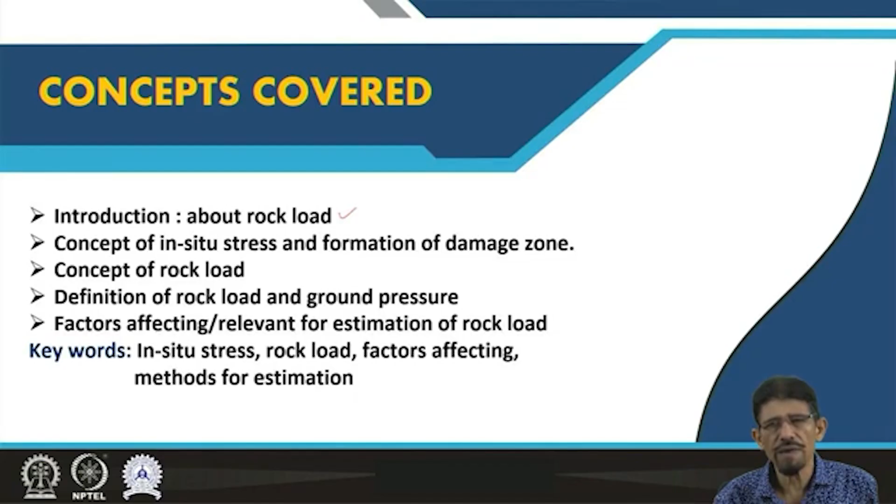Regarding this lecture, we are going to elaborate about concepts concerned to the rock load, and then the concept of in situ stress and deformation, and then formation of damage zone, concept of rock load, definition of rock load and ground pressure, then factors affecting or relevant for estimation of rock load.

Friends, the design and behavior of an underground space structure varies from that of other engineering structures developed on ground surface. In case of ground surface structure, the loads are transferred through certain arrangement to the ground or strata or subgrade, and in case of underground structure it is complicated.

In case of subsurface engineering structure, the load is caused by overburden pressure and due to tectonic stresses, while in case of surface engineering structures, dam, bridge and building, road pavement, highway pavement, etc., the loads are transferred by the appropriate supplementary engineering structure to the foundation element below the geological ground. Hence, we can say that underground structures are constructed within the geoground with many unknown parameters.

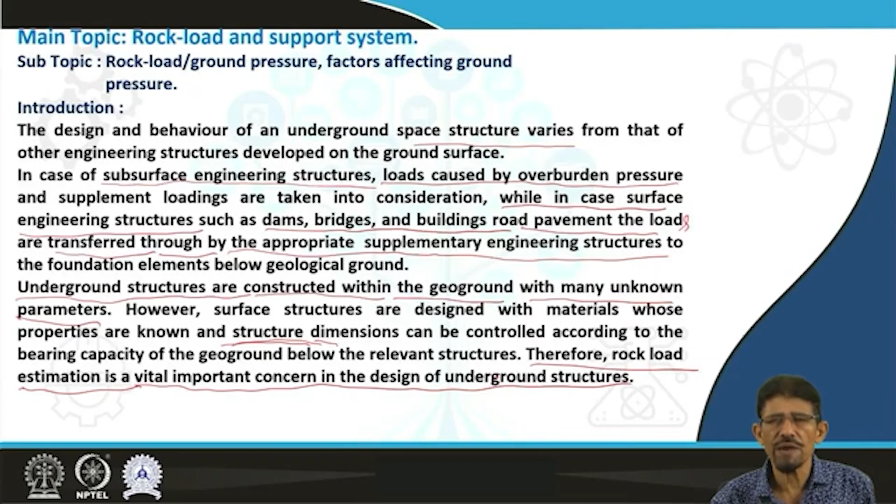Nowadays, we are moving towards the development of underground structures to make the routes shorter, to store hydrocarbons, to dispose some hazardous wastes inside the subsurface, and various underground laboratories, defense chambers. Besides this, classical problems can arise due to variation in rock type from surface toward the depth, then the structural features in rock masses and age of rock formations.

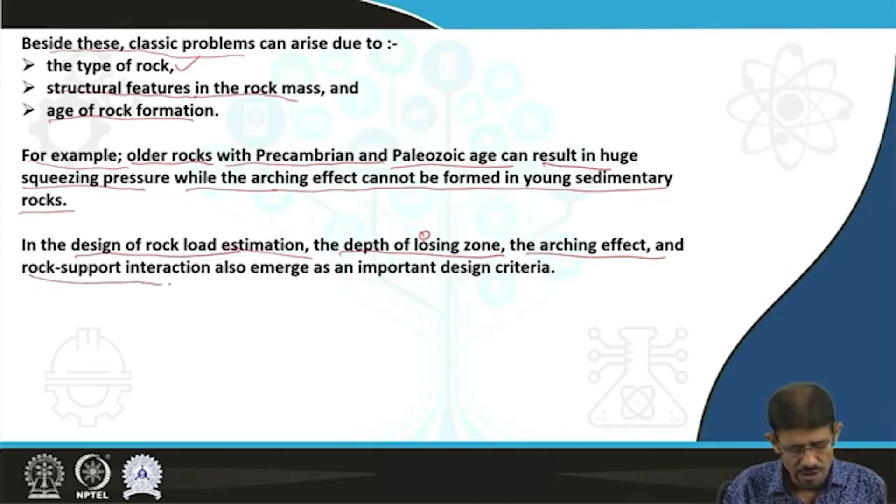Besides this, for example, the older rocks of Precambrian and Paleozoic age can result in huge squeezing pressure. Squeezing pressure is due to deformation of rocks, while the arching effect cannot be formed in young sedimentary rocks. And in the design of rock load estimation, the depth of loosening zone, the arching effects and the rock support interaction also emerge as important design criteria.

Now we are going to see the factors affecting or controlling the rock load, that are relevant parameters utilized for evaluation of a rock load. So first thing, what is rock load? Then we are going to see different types of approaches and parameters. Rock load is simply the weight of rock strata or rock mass experienced on the support system or on ground, therefore known as ground pressure.

The rock load can be estimated involving important controlling or affecting parameters, namely first in situ stress. In situ stress plays a very important role, that is the initial state of stress in any rock strata or geoground. Another component is structure of rock mass. Previously we have discussed the concept of rock mass, that is rock block plus joint. So what are the features of joints present in rock mass?

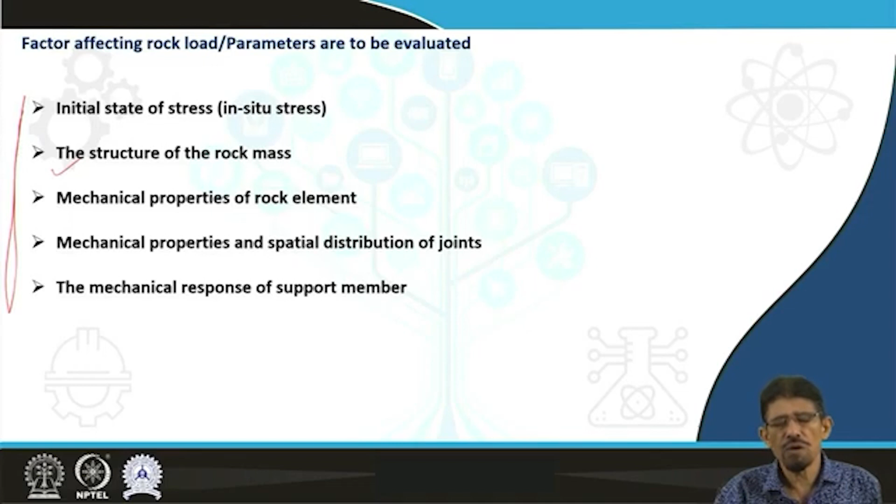Then the mechanical properties of rock element. Then mechanical properties and spatial distribution of joints present in rock mass, which are responsible for making rock strata, and then mechanical response of support members. The knowledge concerned to the in situ stress, the structure of the rock mass, mechanical response of rock element, distribution of joints and mechanical response of support members is going to help in estimating the rock loads. So one by one we are going to elaborate.

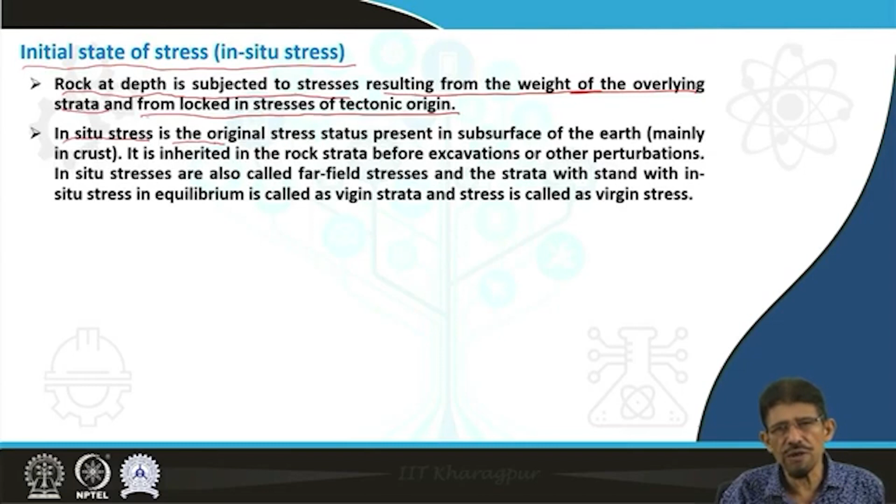Initial state of stress or in situ stress: the rock at depth is subjected to stresses resulting from the weight of overlying strata and from locked-in stresses of tectonic origin. In situ stress is the subsurface stress. You can see here, this is the surface. The stress at a particular point below the surface is recognized as in situ stress. Stress present subsurface to the earth is recognized as in situ stress. As far as engineering geology is concerned, we are going to consider the earth crust, because our work is limited to the earth crust.

Sometimes, in exceptions, extended up to the upper mantle, the shallow level of the upper mantle. So the rock present over this point is going to make some impact in terms of load, that is the weight of overlying strata, as well as the tectonic changes due to underthrusting of plate, or due to upwelling of the magma, or due to various types of motions along the lithospheric plates, which are going to result in stress.

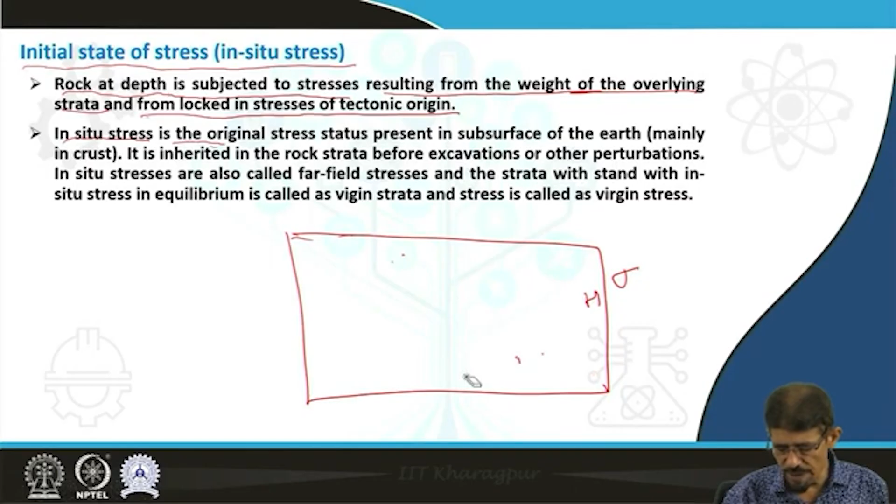So the overall stress present, or total stress present, at point A is recognized as in situ stress, and technically we have two components, one is horizontal, another is vertical. In another way we can say that in any strata or any ground, the ground is stable with its own system, its own in situ stress. The stress present here is recognized as virgin stress state, or this ground is under virgin stress state, or far field stress, or simply in situ stress, or initial stress, or stable stress.

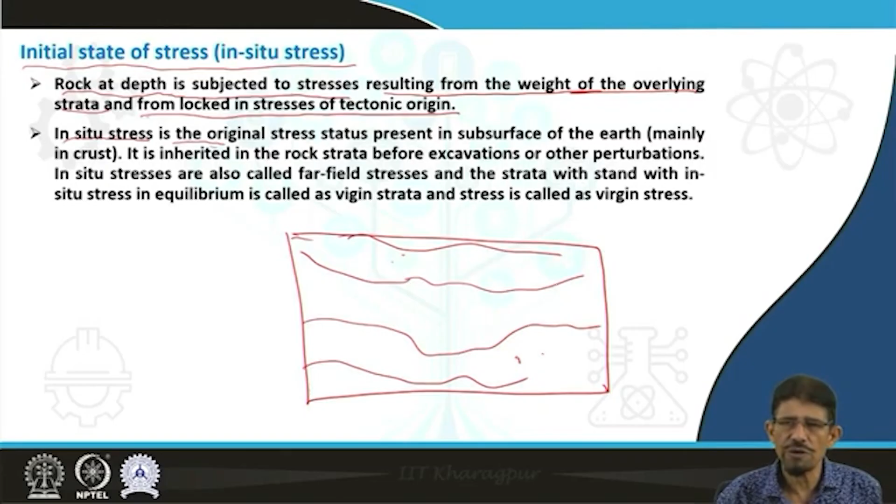In such a situation, when we are going to create any opening in rock strata or in geoground, the stress field is locally disrupted and a new set of stresses is developed in the in situ stress distribution. And these new set of stresses are induced in rock strata surrounding the opening. This new set of stresses is a redistribution of stresses trying to reach equilibrium condition.

In another way we can say that when an underground opening is made in rock strata, the stresses previously present in rock strata are going to show disequilibrium and require redistribution, and these new stresses induced due to creation of the underground opening try to establish re-equilibrium to maintain the original condition.

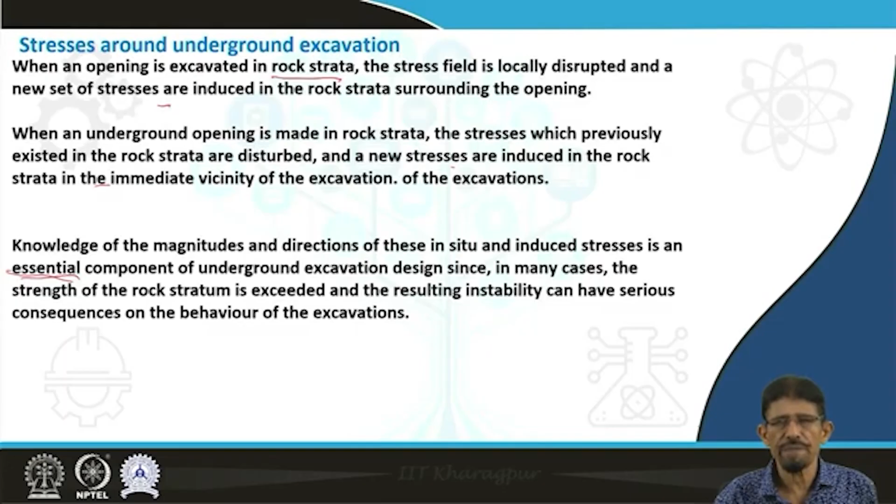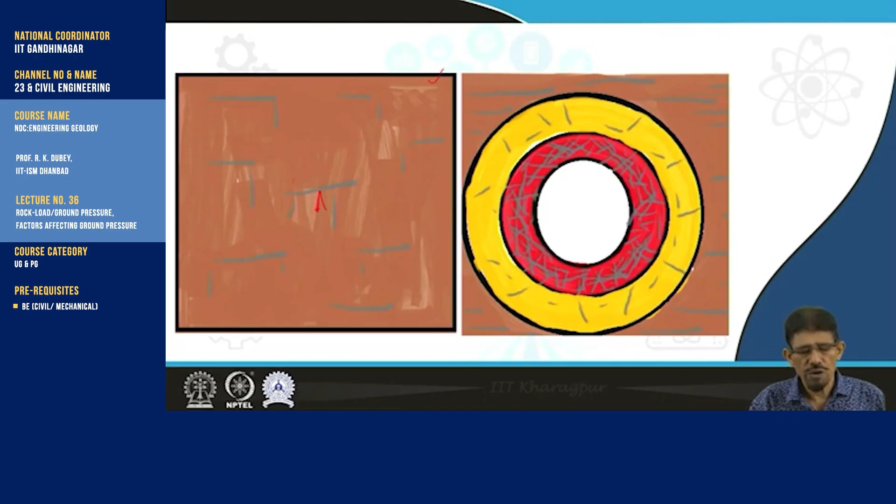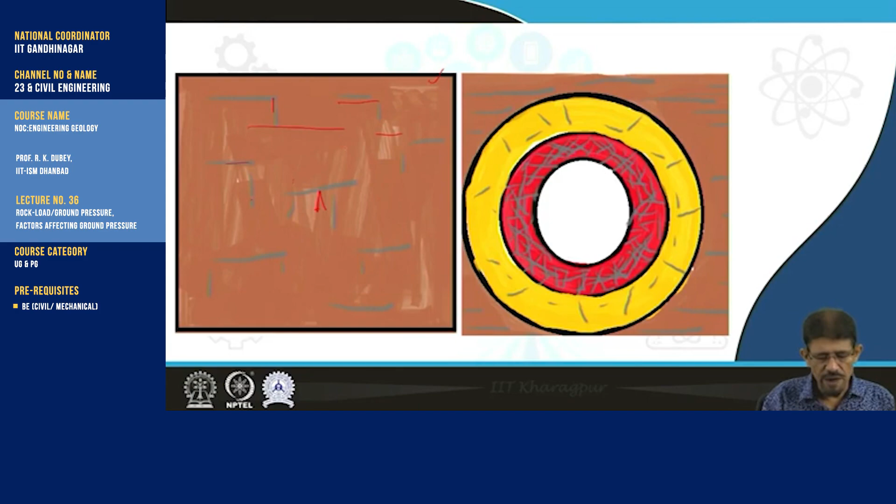Here I try to explain. This is virgin ground where this point A, in terms of in situ stress, is in equilibrium. There is no change in condition of in situ stress. The whole strata is in equilibrium, and the rock strata present in this ground is sufficiently strong and stable, not showing any type of deformation, damage and others.

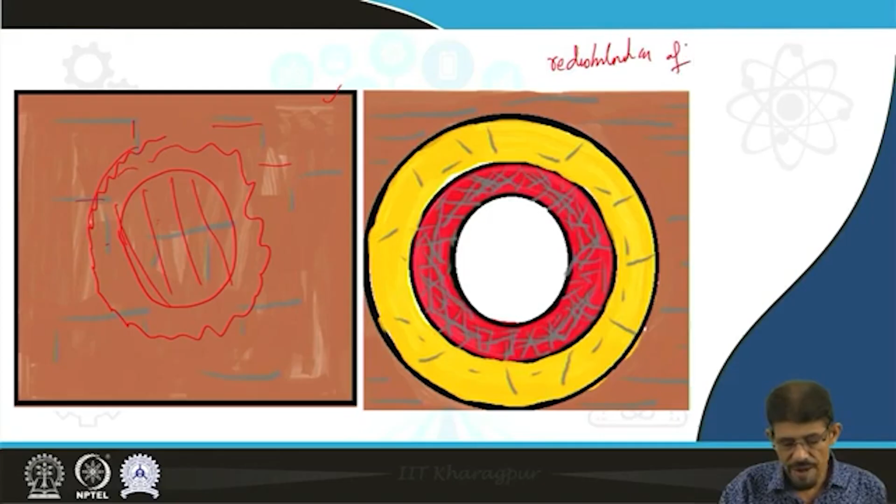When we are going to create any underground opening here in any shape, if we are going to excavate this zone, here you can see, then there is redistribution of stresses near this excavated zone. The redistribution of excavation induced stresses tries to reach the original condition. Due to its habit to regain its original condition, there is a formation of a damage zone. You can see, when we create this opening in this type of ground, there is a formation of one damage zone.

This is very simple. If there is impact on your body due to any thrust caused by a vehicle or caused by striking walls and others, the body tries to restore its original stress condition. To adjust to the original stress condition, if the body is unable to bear it, then there are some adjustment types of features. Similarly here also, due to adjustment of newly induced stresses to reach the original condition, if the strata is unable to bear this type of adjustment, then there is a development of a deformed zone or damage zone.

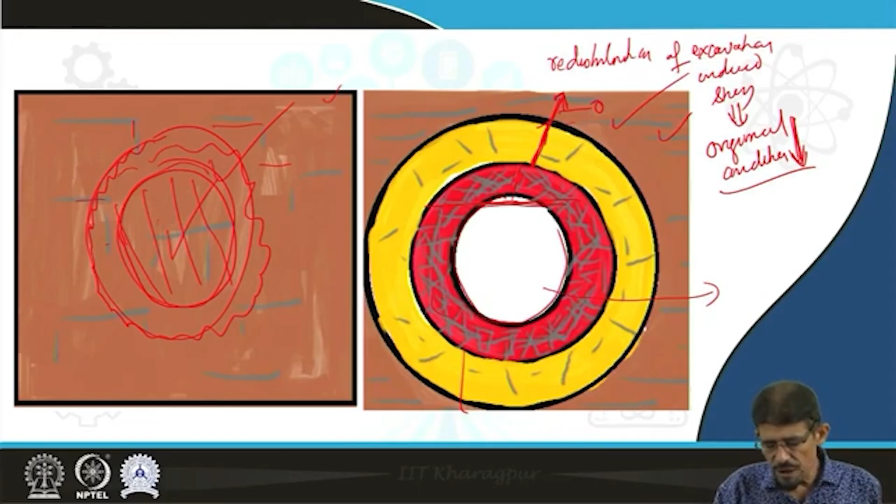Therefore, the mass due to the damaged nature, which was intact previously, is going to move downward toward the opening and finally create collapse of this created opening. So the movement of this ultimately results in collapse of this opening, loss of money, time, maybe some injuries, and damage to instruments, etc.

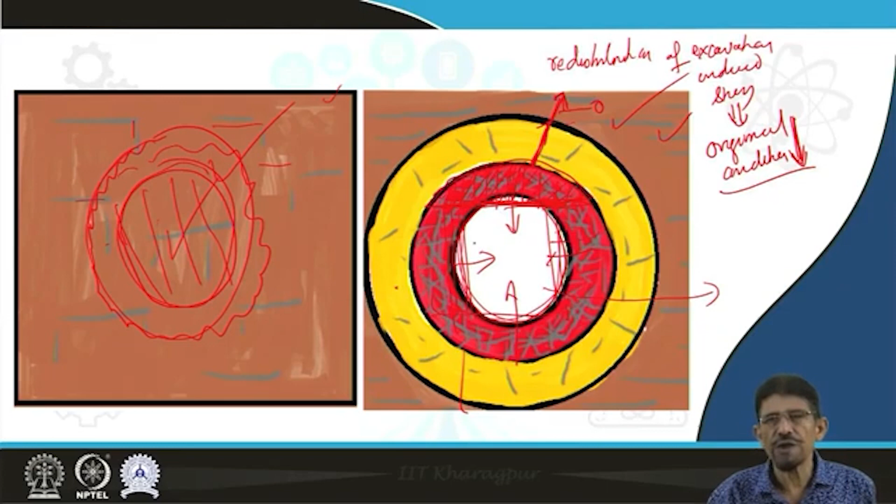The rock load is very simple. It is the weight of this detached rock mass or detached mass of rock. The weight of this material is recognized as rock load. So in a simple way, the weight of this detached mass is the rock load.

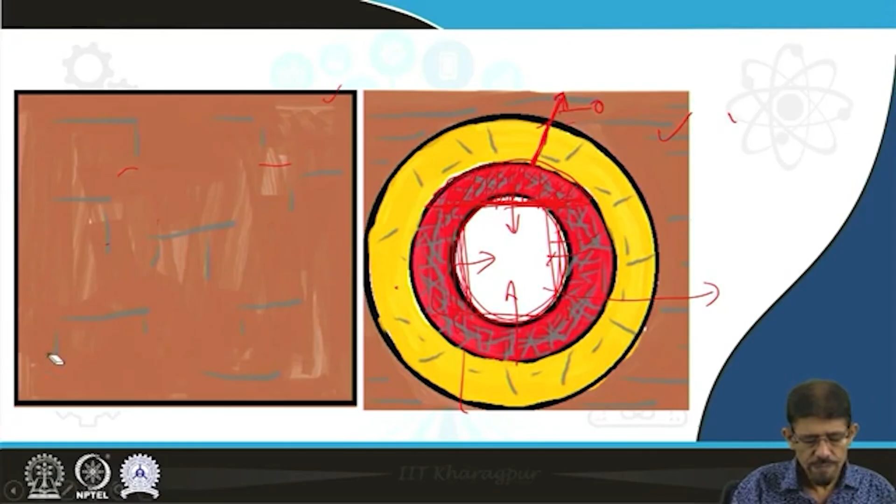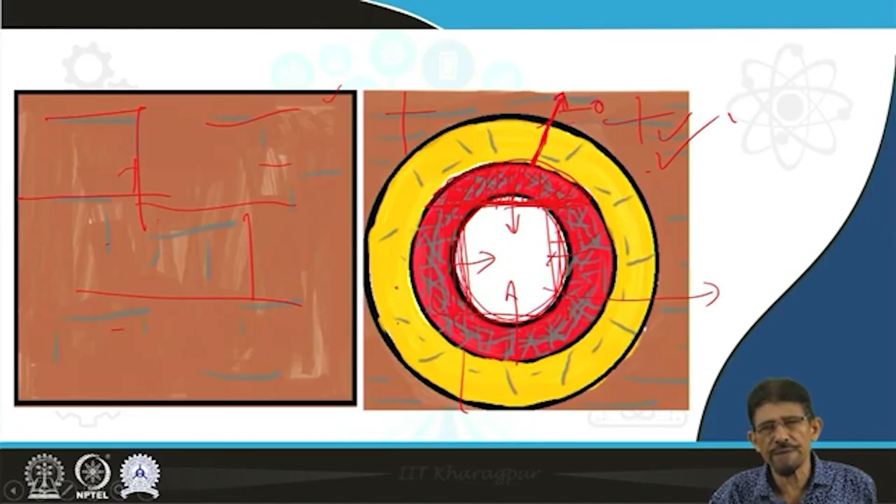As far as in situ stress is concerned, the in situ stress is going to influence the rock mass present here. This rock mass, rock blocks, the whole rock strata, here also you can see intact rock strata. The in situ stress present in this type of ground is going to influence the attributes of the rock strata or rock mass. The in situ stresses affect rock mass properties in a number of ways, such as the strength of rock strata is a function of sustainability of the in situ stress.

If in situ stresses are higher and the rock is intact, then the rock mass or rock strata is strong enough. The stress concentration is inversely proportional to displacement. If the displacement is increasing, then the in situ stress is decreasing, or if in situ stress is increasing, it does not allow more displacement. Normal in situ stress is inversely proportional to joint aperture. It means the joint aperture is a principal parameter in rock mass that participates in distribution of the in situ stress.

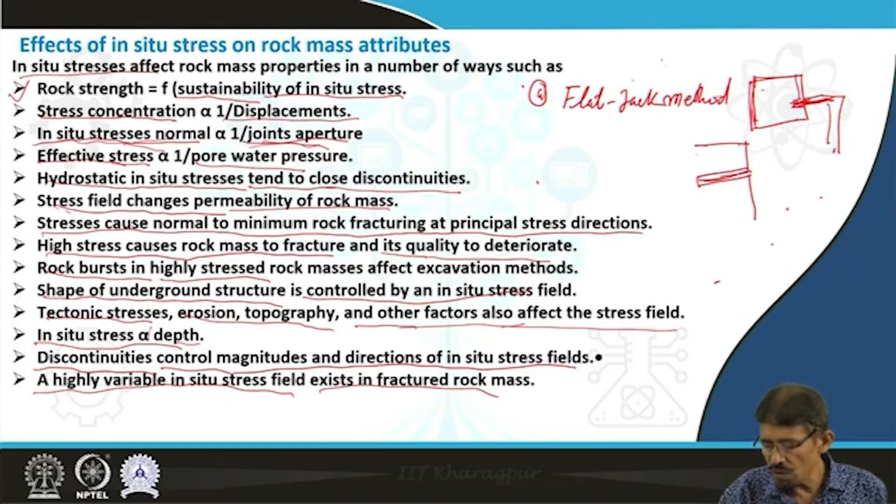Based on flat jack: very simple, two iron plates jointed, welded, having some opening to allow water or oil or any type of fluid, and this whole system is attached to a pump. We make some slits here, put this in, and pressurize. Due to pressure there is expansion in this, and in this way we measure. From time to time we will discuss this if required.

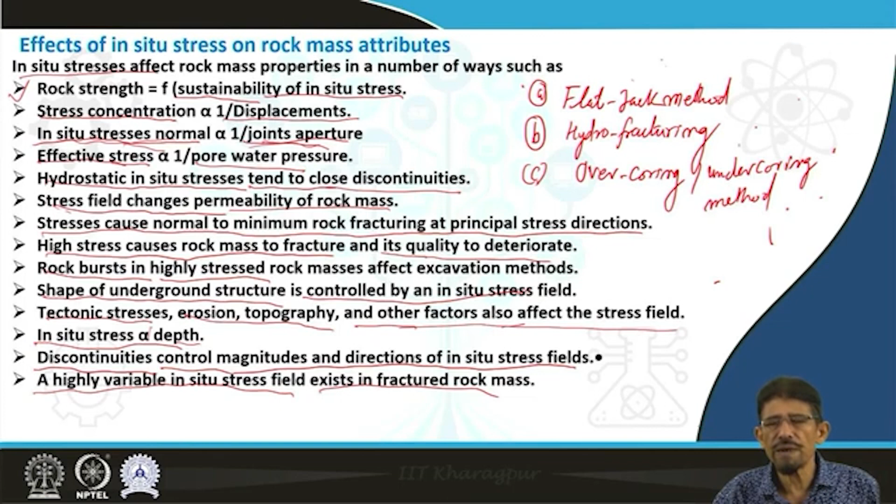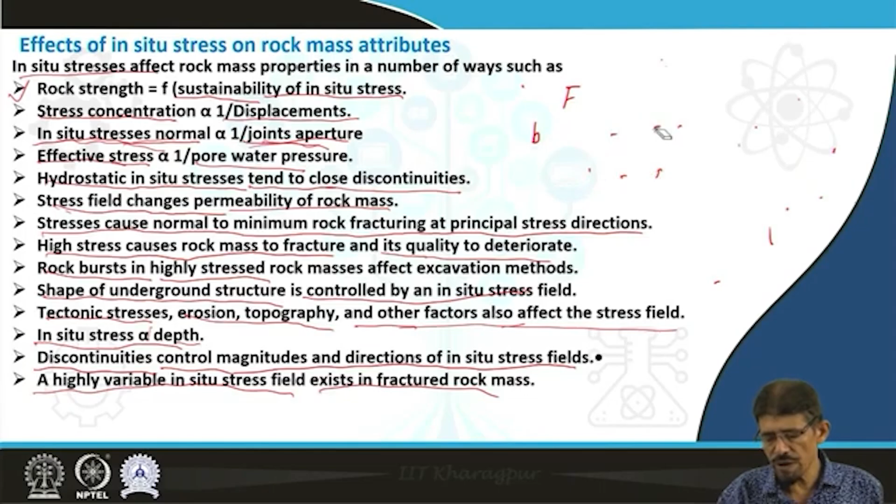In situ stress is a different topic, therefore in brief. Then hydraulic fracturing or hydrofracturing, widely utilized in in situ stress measurement and in the recovery of coal bed methane, shale gas, etc. as additional. Here we have overcoring and undercoring methods. Beside this we have many methods of in situ stress measurement, considering the Kaiser effect and others. From time to time we will discuss the content. Here the topic is different.

Another parameter which influences the structure of rock masses is the joint. The joint divides the rock mass into certain types of features, and roughness, filling, aperture, distribution, contact and conditions influence the in situ stress, and in another way the rock load.

Another is the mechanical properties of rock elements. When we compress, apply tension, or shear, the strength and strength-related parameters of rocks, such as yield stress, and mechanical response like modulus, Poisson's ratio, failure strain, residual strength, peak strength, etc. influence the rock load. These are important components of rock strata, because the block of rock mass is made up of rock. Therefore the strength response or mechanical response of rocks is also very important for this purpose.

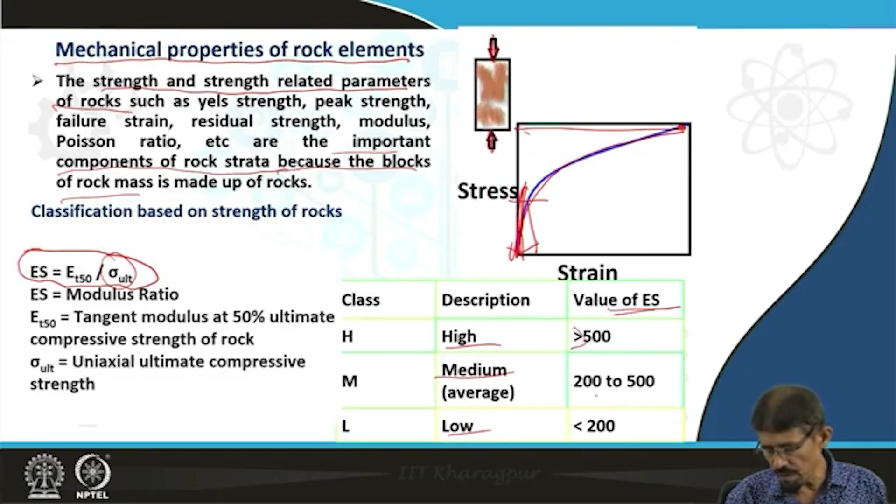As we have already elaborated, the stress strain curve provides the strength and the concept of modulus, the ratio of stress and strain measured in the elastic region only. If we determine the modulus ratio by dividing the tangent modulus at 50% by the ultimate stress, we can divide the rock as high, medium and low: the value of Es is more than 500, 200 to 500, and less than 200.

Based on strength also, rocks can be divided as very high strength, high, medium strength, low strength, and very low strength. Quartzite, diabase, basalt, the majority of igneous rocks, and strong metamorphic rocks are considered very high strength rock. Weakly cemented sandstone, some hard shale, the majority of dolomites, limestone, etc. belong to high strength. Then shale, porous sandstone, limestone, schistose rock and varieties of metamorphic rocks belong to medium strength.

Then low strength: porous, low density rock, friable stone; and very low: clay, shale, weathered material, soil, etc. Soil is not rock. So there is also controversy related to the boundary between rock and soil. If we have time, we will discuss it.

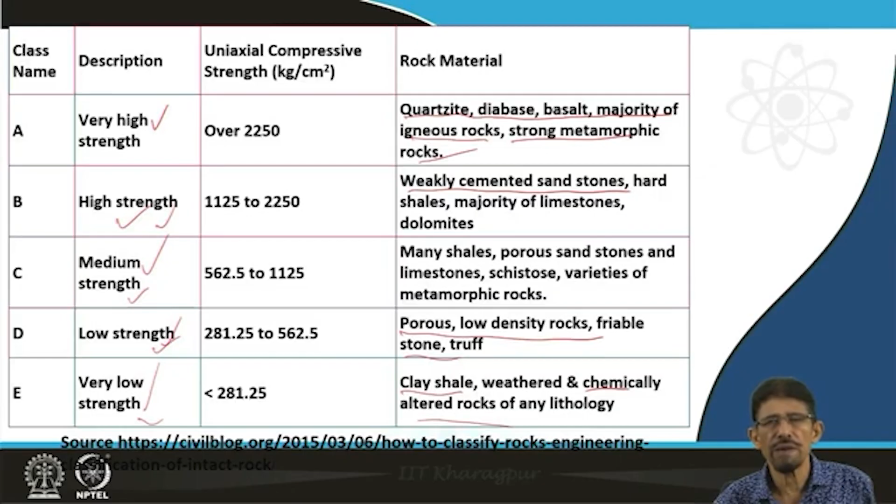Friends, this material we prepared from the book Tunneling in Weak Rock, written by Bhawani Singh and R.K. Goel, published in the Elsevier Geo-Engineering book series, edited by respected Professor John A. Hudson, pages 1 to 489, with partial support from the book Introduction to Rock Mechanics, written by Satyanarayan Bhutkuri and Katsuyama, 1994, pages 1 to 272, published in Japan.

Friends, in this lecture we conclude that in situ stress is present in the subsurface of the earth, and excavation in rock strata causes change in in situ stress in a localized zone. A new set of stresses develops around the excavated opening, resulting in the formation of a damaged zone, damaged rock and deformed zone. The weight of detached rock mass of the damaged zone is called rock load, and if the rock load is experienced on the ground in the form of support, it is recognized as ground pressure. Ground pressure is actually the impact of rock load.

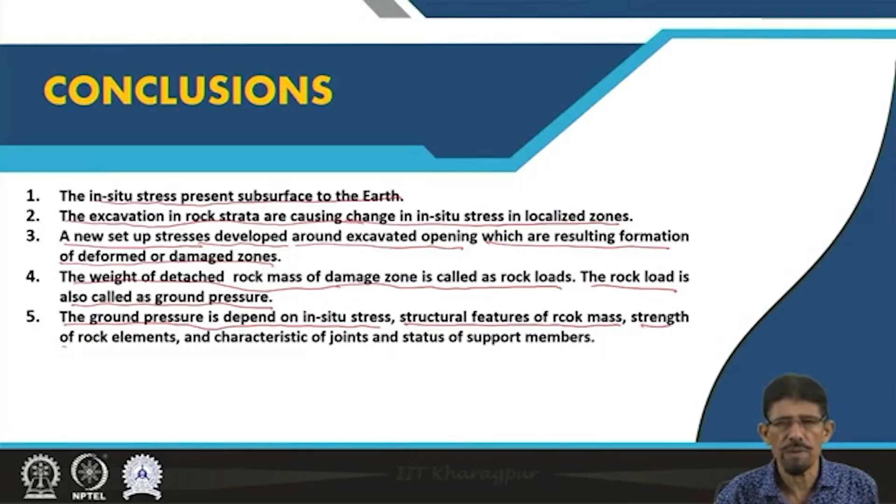The ground pressure depends on the in situ stress, structural features of the rock mass, strength of rock elements, characteristics of joints, distribution of joints and strength of joints, then the response of support members. Dear friends, in this class we elaborated the concept of in situ stress in brief, rock load and ground pressure, then factors relevant to estimating rock load. In the next class we will learn again about rock load, then in detail about methods for estimation of rock load or ground pressure.